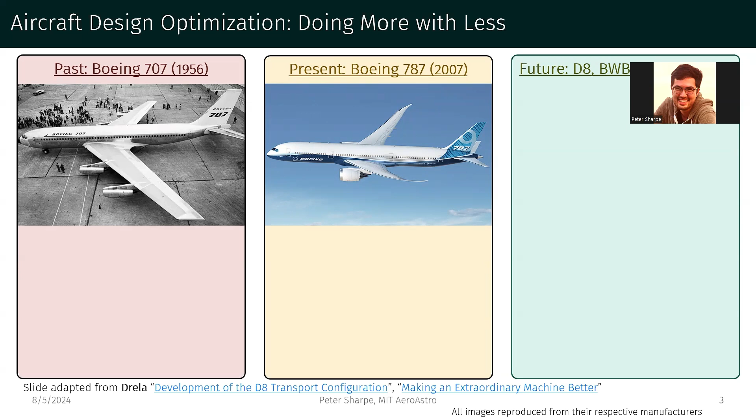So I'd like to start off with some comments adapted from remarks that Mark made. If you look at the history of aircraft design optimization, in about 1956 we got the first jet airliner. Today we've got something that looks pretty similar, but under the hood a lot is actually different.

In terms of fuel economy, we've gone from about 45 passenger miles per gallon up to about 120 or so. If you look into the future, you can target numbers as high as 160 passenger miles per gallon. Now it's kind of instructive to think about what are the technologies that actually got us to each of these levels.

If you look in the past, the mindset was something called satisficing, which is basically a decision-making heuristic that you go through when optimization is intractable. It's kind of the engineering equivalent of good enough.

Today there have been massive advances, especially in propulsion, but also in subsystem level optimization. So taking the problem, splitting it up into different disciplines and optimizing those together.

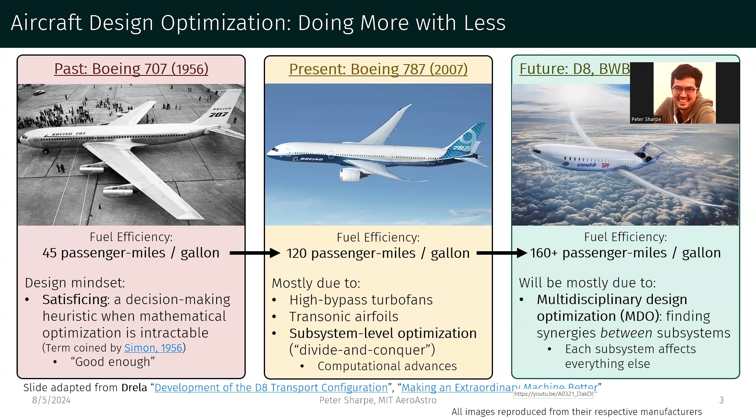Now looking forward, most of the fuel efficiency gains that we expect to see are actually from taking the whole system together. This is called multidisciplinary design optimization, or MDO. It's about finding the synergies between subsystems rather than within them.

And the particular flavor of MDO that we're going to be focusing on today is what's called conceptual MDO. This is kind of the initial study of design trade-offs that you go through, basic feasibility and sizing.

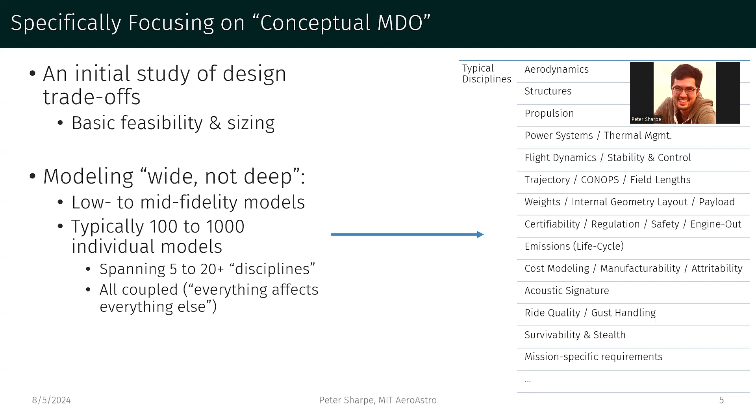And the idea here is that we're modeling wide, not deep. So we're talking low, medium fidelity models, relatively simple, but maybe hundreds or even thousands of them. Typically those are lumped into what we call disciplines, different ways that you can analyze the design - aerodynamics, structures, propulsion - but there are many dozens of others you could consider, and all of these interact with each other.

So why do we care about this particular kind of early stage conceptual optimization? Well, the first reason is that most of the performance of the final design is actually determined by your early stage decisions. A lot of this low-hanging fruit, you can't capture those opportunities later if you miss it in the early stage.

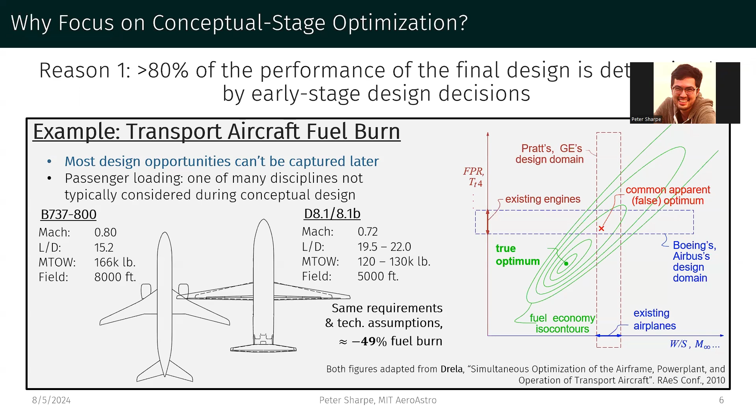Similarly, you can't really fix the problems later if you don't catch it in the early stage. So that's really what we're after.

Secondly, these days there are a lot of new technologies, specifically thinking about electric aviation, drones, UAVs, that are enabling us to go back to the drawing board and look at the early stages of aircraft design again. This is exemplified here by a lot of the electric vertical takeoff and landing aircraft.

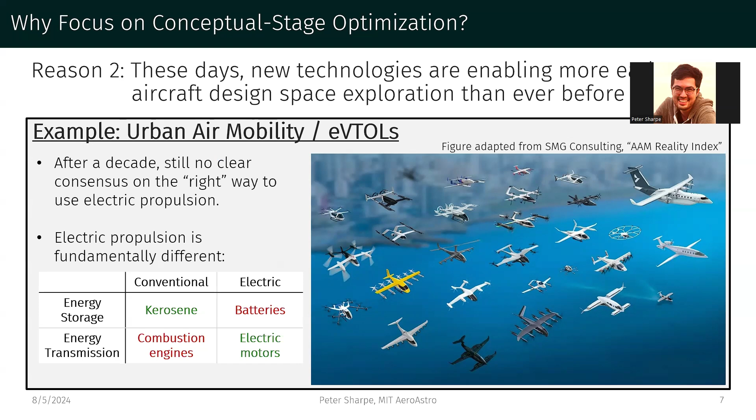And even after 10 years of playing with these technologies, it's still kind of the Wild West. There's not a lot of convergence in terms of what these necessarily look like.

The final reason is that optimization itself - a lot of times we think about getting to the optimum design, whatever that may mean - that's really only about 10% of the value.

A lot of the value of doing this exercise is actually in determining what questions you should be asking. What are the market trade-offs that you might look into? Where should you spend your R&D budget? What kind of model assumptions are you most sensitive to?

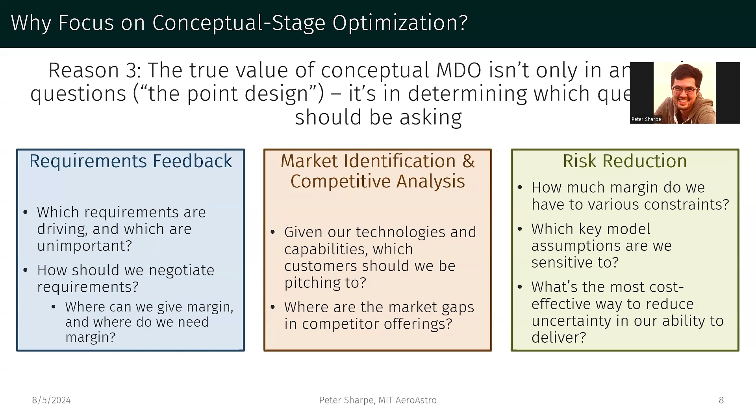So with this in mind, we can kind of look at, okay, we've done all this research in MDO, where do we kind of stand?

This is recognized in a couple places, most notably in an MDO colloquium in 2010. The ultimate benchmark of a field's impact is how much it's actually getting into industry. And going through the literature, we see kind of a mixed bag. On one hand, everyone recognizes the immense power of advanced optimization methods to solve some of these previously intractable problems, and there have been headway made.

At the same time, it's usually this double-edged sword where actually implementing these in an industrial setting has a monumental level of complexity in some cases. So because of this, the same colloquium concluded that the actual use of genuine MDO is somewhat limited.

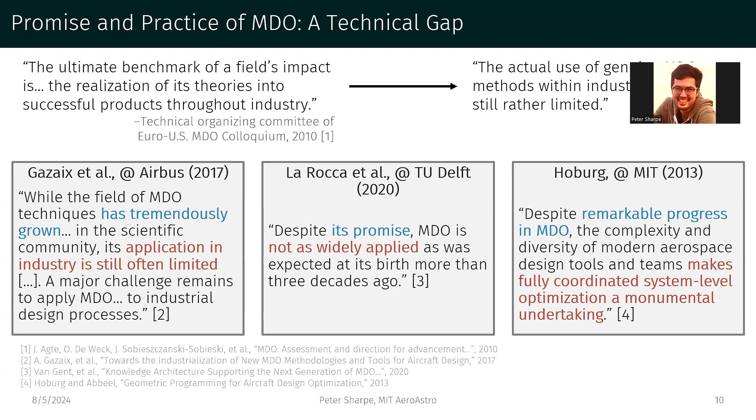So that's kind of the context in which this thesis starts, which is basically how do we actually take some of these big research wins and translate them into more industry impact. And the contention here is that we basically need to do optimization while considering all costs. We use costs here deliberately because that's kind of the language of optimization. Typically, we're minimizing some kind of a cost function.

If we think about our typical mental model of optimization, we've got a problem. It's got an objective function that we minimize. It's got design variables, the things we're changing, and then it's got the constraints. And that result has some cost associated with it. We could also think about the computational cost of getting to that solution. But there's a much broader picture here that we also want to consider.

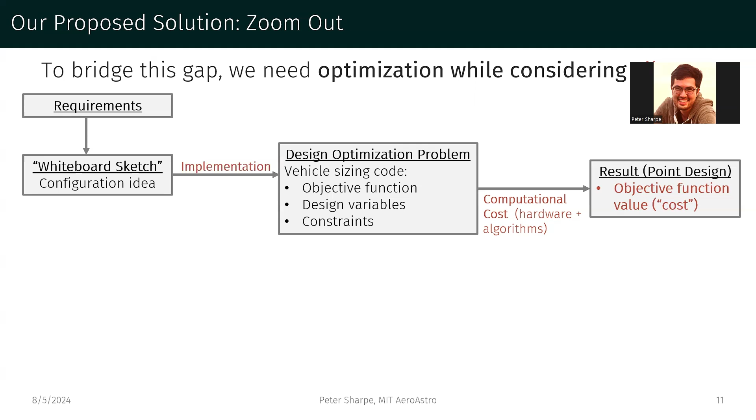First of all, we actually need to go from our problem specification, which is usually in a Word document or some kind of written or verbal form, and translate that into a precise mathematical paradigm. Depending on the framework, that can be very easy or very difficult. Similarly, oftentimes we don't get that right the first time. In fact, we almost never get that perfect on the first time. So there's a cost associated with going back to the drawing board and reformulating that problem.

Maybe we want to freeze something and optimize over other things, or maybe we want to study what happens if we change the sensitivity of certain parameters. Secondly, in addition to the problem-specific stuff, there's also physics modeling we need to incorporate. These aren't specific to the particular airplane you're designing, but basic modeling like aerodynamics, structures, propulsion, different pieces. Getting those into the framework has a modeling cost.

Ideally, the design also doesn't end at the point design phase. Ideally, you can carry this forward. And if you're going to build this, often there's some kind of design review process you go through. There's an interpretability cost of determining: can you actually convince an external audience that this design, and the way you got to it, is trustworthy? How interpretable is this optimization process? Again, that's something we can consider when we sketch out a framework.

Finally, even after the final design is made, after you're building it, you may get halfway through and find that one of the components isn't performing up to spec, and now you need to redesign around that. Or you want to track a digital thread or digital twin as you have some kind of ongoing hardware. Again, a framework can potentially support you through these steps of the design process.

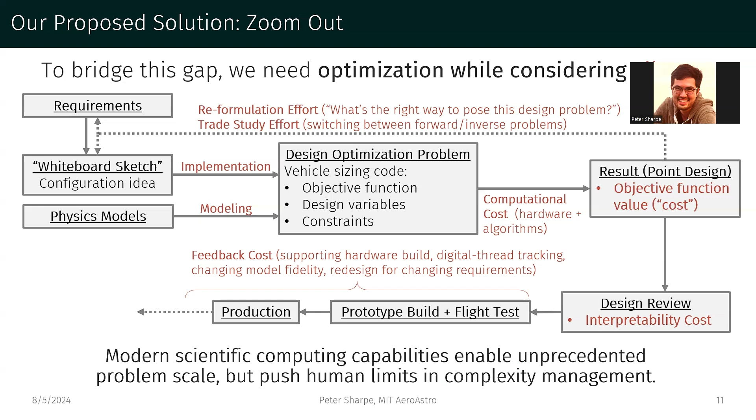So the takeaway here is that modern scientific computing capabilities enable unprecedented problem scale, but they really push the human limits in terms of complexity management. And that's really what the thesis is aiming to tackle here.

Now, if we look at what people do today, because optimization is used in some forms in aircraft design today, there are three main paradigms out there. The first one is called black box optimization. This maps very closely onto our mental model of optimization. You get your analysis tool, you wrap that inside an optimizer, and then you iterate. This encompasses probably 95% of industry codes today, or some flavor of this.

The reason for that is that they're very easy to implement. You can go from your whiteboard drawing to code very quickly, and they let you model more or less anything. The downside is that the runtime is not very scalable. Once you get beyond, say, a dozen design variables, it starts to become exponentially slower to run. Because of that, this has motivated research into other possible paradigms.

The first one that has gained traction is gradient-based methods with analytic gradients. This is similar to black box optimization, but you provide exact derivatives for every component model that you stitch together in order to accelerate the optimization process. That gets arguably the best speed and scalability you can achieve here, but actually implementing those derivatives, especially for custom models, becomes somewhat expensive on the user development side.

The third kind of approach is what's called disciplined optimization. An example for the aircraft design crowd might be GPkit. The idea is that you take the mathematical space the user is allowed to model in and restrict it either to convex functions, geometric programs, or some flavor of that. By doing that, you can make certain assumptions about the user's code, making it easy to model but also fast to run. The downside is that by restricting the user to this mathematical subspace, they may not be able to model all of the physics they wish to model.

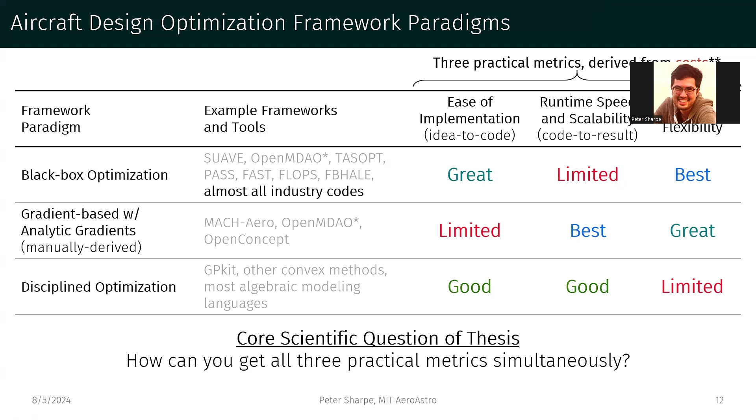So the core scientific question of our thesis is: is there a way you can do okay, at least, in all three practical metrics simultaneously? The contention is that code transformations, which we'll define next, are a path to doing that. That's what this thesis is about.

To overview the specific PhD contributions: the first is this code transformations paradigm—we'll define it and give a proof of concept along with case studies. Second, we'll fill that out with traceable physics models inside that framework. Third and fourth, we'll talk about strategies to incorporate black box code into this framework. Fifth, there's a system identification study, another case study using this framework, but we'll skip it in this talk for time.

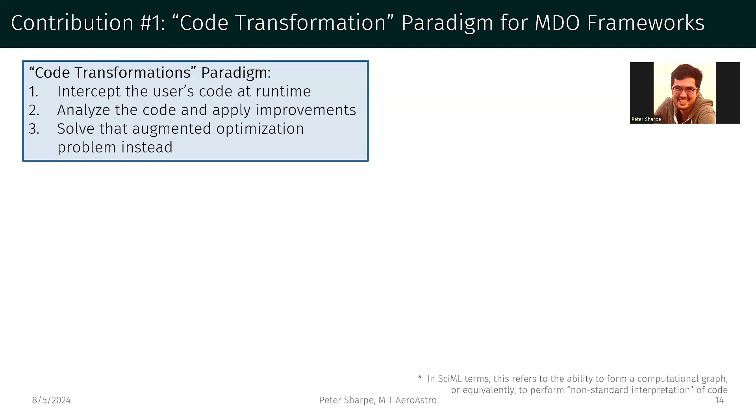So let's start with what is a code transformation. At a high level, code transformations are any kind of transformation you can apply to code that intercepts it, analyzes it, applies some improvement, and solves an augmented optimization problem instead. That's a pretty broad definition, and it actually encompasses a lot of modern techniques in math and computer science—most notably automatic differentiation, but also sparsity detection, automatic scaling of problems, log transformation, eliminating common sub-expressions if you can find redundant computations, computing on different backends, things like that.

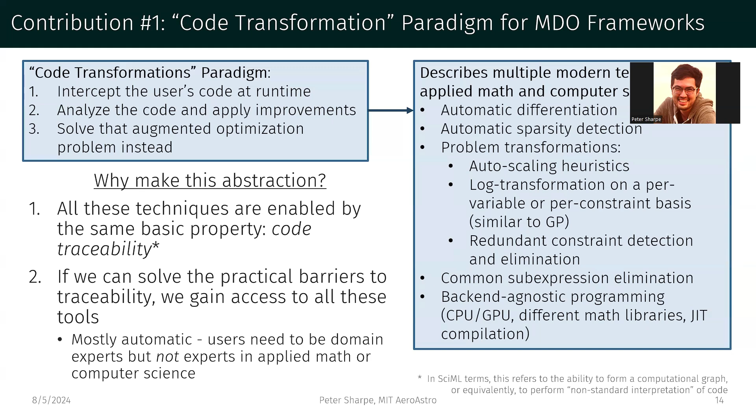These are all fine by themselves, but the reason we pull this out is that it recognizes all of these techniques are enabled by the same underlying requirement of code, which we call code traceability—essentially the ability to form and manipulate a computational graph of your code. We'll show what that means next. The basic reason for this is that if we can solve this traceability problem, if we can make it easy for industry engineers to write traceable code, we kind of get most of these transformations for free. It means the user can get fast code without necessarily implementing all these techniques on their own, without being applied math or computer science experts—only experts in their engineering discipline.

So the first contribution of the thesis includes a proving ground for evaluating what these frameworks look like. That's called AeroSandbox—it's a Python package, open source, available on GitHub. It's a proof of concept of what these code transformations could look like in design practice, both for airplanes and for other engineering systems. We'll start by talking about some of the numerics and optimization happening inside this.

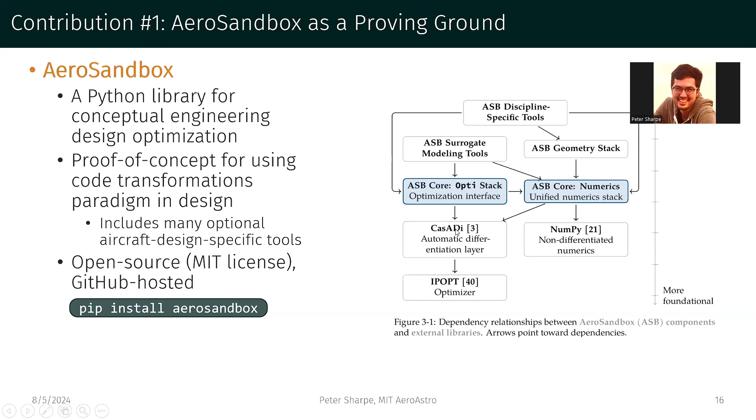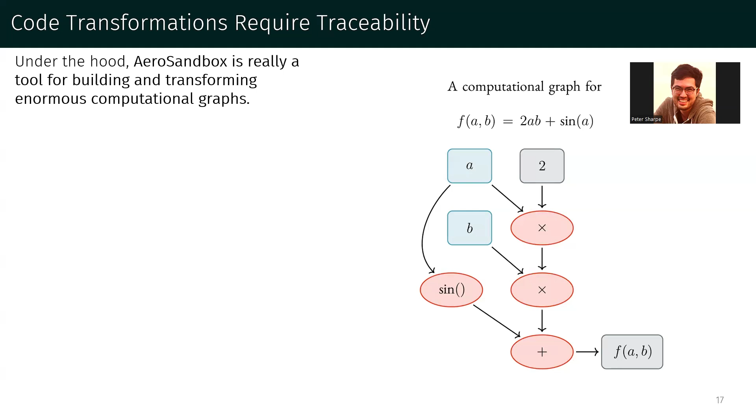So first, we talked about a computational graph earlier as being the key thing for whether code is traceable or not. What do we mean by that? A computational graph is essentially a way to map out the execution tree of a piece of code. Imagine you have some expression—you can map out what sequence of operations you have to perform, step by step, in order to get to the result. This is a directed acyclic graph that you can make for most computer programs, assuming you can see inside the black box of different functions.

So how does this actually work out in practice? Again, our three metrics: we want to go from an idea to code fast, we want to have speed and scalability, and we want mathematical flexibility.

If we compare to black box optimization methods, we can test on something like the Rosenbrock optimization problem. This is kind of a standard test case in optimization, and here we work with an n-dimensional variant that gives us a knob to change the difficulty of the problem. Now, as we change the number of design variables, how does the computational cost scale? We can evaluate for a bunch of different methods.

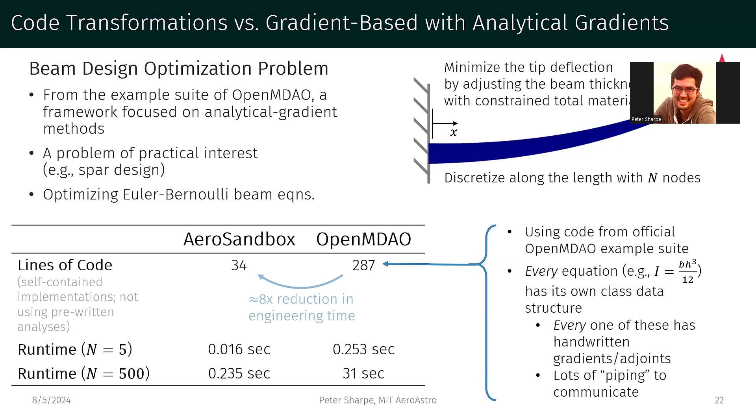And because of that—again, that's an imperfect metric—but it corresponds to a decrease in the amount of engineering time. Often that means you may be willing to pose questions you might have otherwise deemed too complex before. In fact, this code is short enough that we can show it here on one slide for this beam design problem.

So what's actually happening here? Well, we're defining constants here, initializing an optimization environment.

And then we get this very modeling-language-like syntax where really we're just implementing the actual governing equations themselves, boundary conditions, and then the actual solve is just a single line here. So it's pretty abstracted in the sense that the user doesn't have to tweak anything if they don't want to.

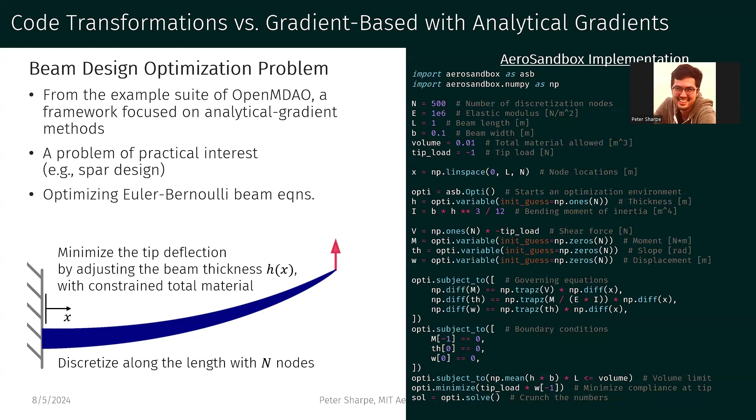There are sensible heuristics applied throughout to get good enough results. Under the hood, they can expose as much of this as they wish, but at least the learning curve is made more shallow by having a simple default API here.

So what are the pros and cons of this code transformations framework? Well, the benefit is that you can get the performance of efficient code without having to write efficient code. So you get comparable speed with not as much effort as it ordinarily might take. It also abstracts away the optimization-specific details, meaning you can focus on asking the right engineering question rather than getting the numerics perfect.

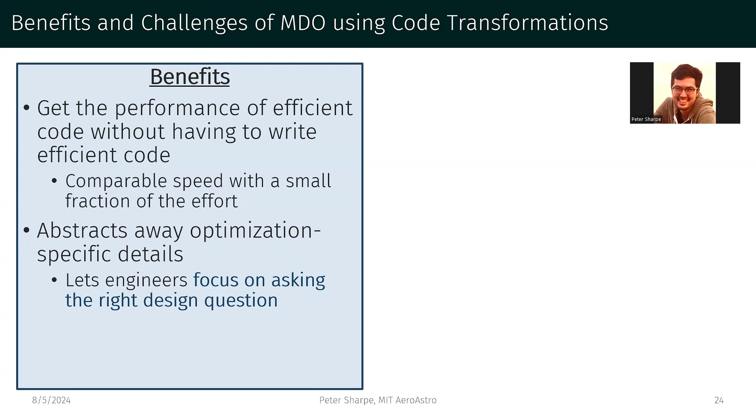The downside of this is twofold. First, we need to actually intercept the user's code in order to make that computational graph representation. So we have to make assumptions about what that user's code does; in particular, it has to use our numerics library to achieve that. Framework syntax becomes critical, because as soon as you ask the user to deviate from the workflow, you're potentially completely negating that ease-of-use benefit. So you really have to think carefully about what the user experience is going to look like.

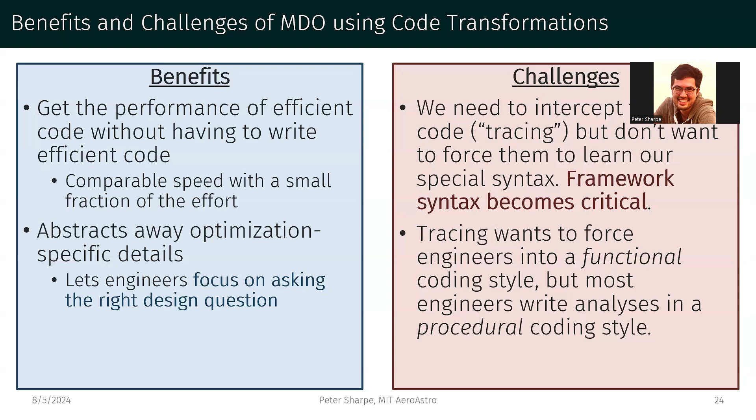Secondly, the user's code style also has to be considered. Engineers like to write a type of code often called procedural code, that looks like a script or a spreadsheet - that's how they build up analyses and then flip it into an optimization framework. A lot of automatic differentiation frameworks, other code transformation frameworks, expect what's called functional code, or pure functions. That's not necessarily the best map onto how engineers naturally write code. We can talk more about that if people are curious.

So how are we actually making these computational graphs? Like I said, we basically have to intercept the user's code. But the trick is we want to be a little tricky about how we do that - we want to basically silently swap their math library in a way that they don't really notice.

So what do we do? We basically take the standard Python math import that a user might write code in, and we swap it out with our own version, which duplicates the API one for one, parameter for parameter. So we can intercept their calls, meaning that if they pass in a type, or a type of array, that needs derivatives or needs sparsity, we can apply the appropriate framework to that.

But if they don't do that, it's essentially a pass-through into the basic NumPy framework they were expecting to use anyway. The nice thing is that existing code that's out there, provided it's written in Python and with common packages like NumPy, SciPy, and so on, can basically be ported over one-for-one, with a couple of caveats.

And the goal here, again, is all about the learning curve. If an engineer knows Python, we want them to be able to more or less jump into this with minimal additional learning. So that's the first contribution of the thesis here.

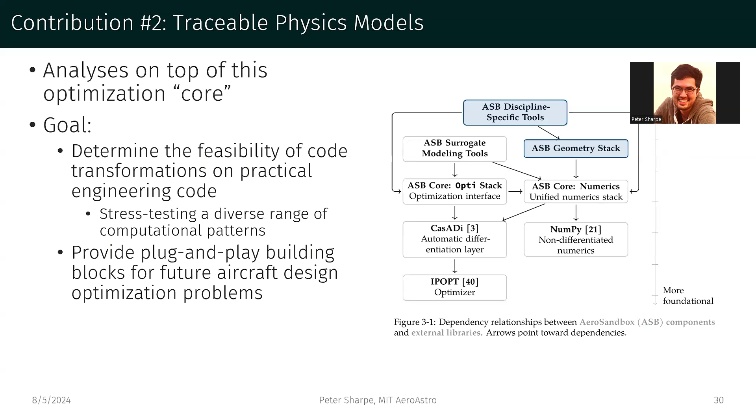The second one is, okay, we built this framework, but now we want to test out whether this is actually practical for engineers. The second thing we can do is build analyses on top of this optimization core to figure out, if we stress test a diverse range of computational patterns, does it actually work in practice? And then, if we want to pose aircraft design problems, does that work?

So underneath the hood, there are a lot of models that have been implemented on top of this, all your bread and butter aircraft design models. Here, we're going to talk about just a couple of them, specifically the aerodynamics and the flight dynamics ones, mostly because they have the most interesting visuals, I think.

Happy to talk more about the areas that people have interest in.

If you're going to do engineering analysis, a lot of it requires discretization of some sort, otherwise known as meshing, and there are different ways you can do this. So the first thing we do is build a differentiable geometry stack, a differentiable meshing stack, which can take abstract geometry representations, kind of your AVL style aircraft model, and form a 3D mesh out of that.

It can form a 3D mesh at different levels of what are known as degenerate geometry. This is taken from a strategy used a lot by OpenVSP. So you can have meshes of individual spars, of thin surfaces, of full outer surfaces, different parts of the aircraft, depending on what analysis you're doing.

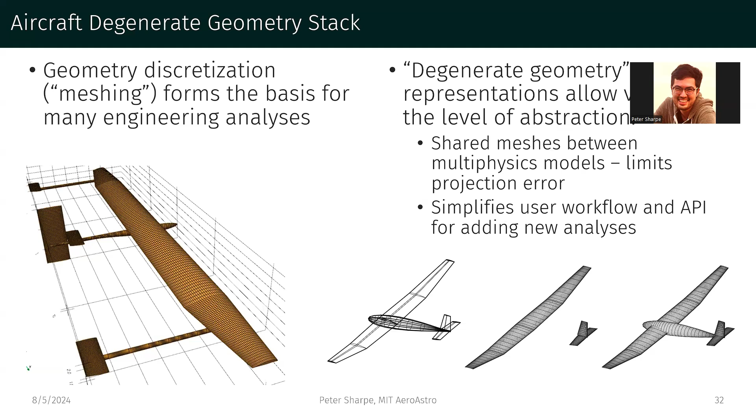The benefit is that if a user wants to add an analysis, the learning curve is a lot shallower—they don't have to do their own meshing. Secondly, if you have a multi-physics problem, like an aerostructural analysis problem, you don't have any interpolation or projection error between different meshes. You can use the same meshes for different problems and solve it exactly that way. That's the benefit of making this abstraction.

So what are some of the models implemented here? The first one, bread and butter, is a vortex lattice method. This is used every day for rapid stability and control analyses of different aircraft, initial configuration aerodynamics. It stress tests the robustness of the geometry stack, as well as basic linear algebra kernel operations.

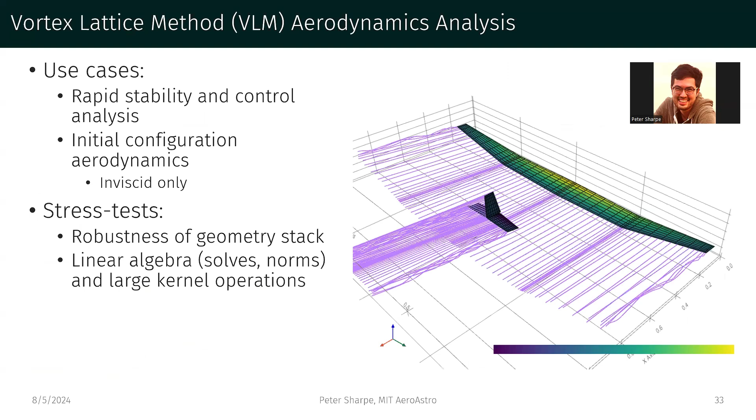The second thing we can do is a lifting line-based aerodynamics analysis. That's similar to the vortex lattice method, but compared to it, it has profile drag, faster runtimes, and better optimization stability.

There are a couple different lifting line models implemented. The first one is traditional—basically a linear lifting line model. Here the CL alpha, the lift curve slope, is assumed to be linear, and you can do some simplifications based on that.

There are also quasi-linear and fully nonlinear models. Those give you increasing fidelity in certain interesting aerodynamic cases. These stress test nonlinear systems of equations, as well as making a computational graph through value-dependent code execution.

What I mean by that is if you have a nonlinear solver, you don't know a priori how many iterations it's going to take to converge. So the computational graph isn't fixed as soon as you run it. In some sense, you have to embed a variable computation step in there, which can dynamically adjust depending on how many iterations it may take to converge. That's an interesting stress test case.

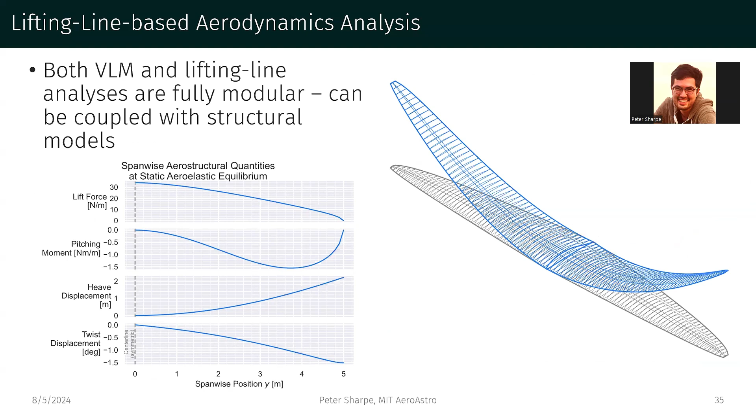Just as an example, by having the uniform geometry stack, we can do interesting problems like an aerostructural analysis problem very quickly just by stacking these different analyses on top of the same meshes.

The final aerodynamic model included here is what's called aero buildup. This is the one we probably use most often and is one of the more interesting ones in my opinion. This is basically a fully differentiable DATCOM-like method, or semi-empirical aerodynamic buildup.

In regions where flow is well behaved, it uses theory-based models. In regions where it's not, it uses extrapolations to wind tunnel data. It's essentially C1 continuous, so a smooth model across all ranges of Reynolds numbers, Mach numbers.

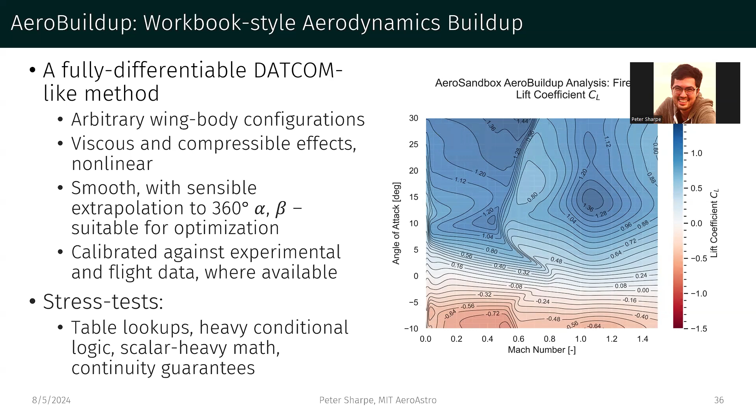This is stress testing table lookups, heavy conditional logic based on all the different orientations—can you actually guarantee continuity when you're stitching across anything from very low Reynolds flight all the way to transonic, high alpha flight, continuously?

It's kind of interesting to see what that graph looks like when you expand it out. This is for the Firefly aircraft, which we'll show in a little bit. You can see you get modeling here in the linear regime, and as you go through stall and then into deep stall, you get more and more interesting effects, but it's all C1 continuous through it.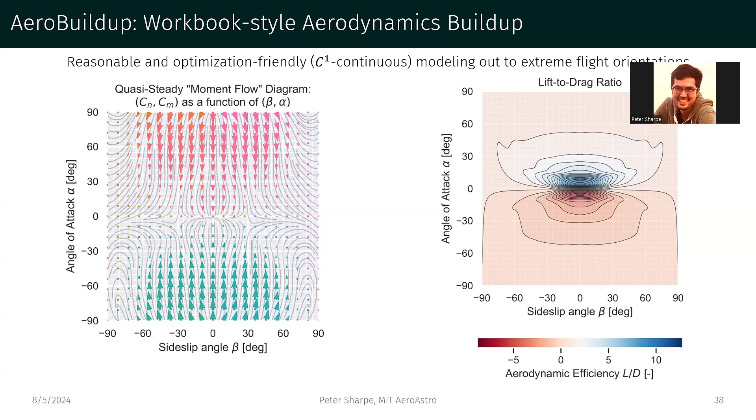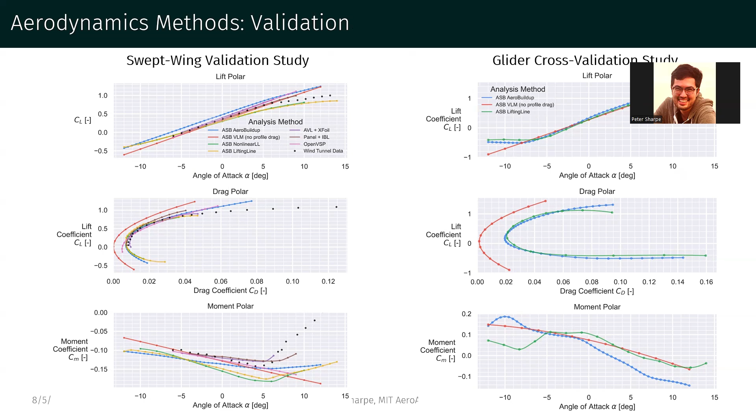In the thesis, the written document, there are a couple of validation studies for these various aerodynamic analysis methods. We won't go too much in depth here, but in short, the vortex lattice method is the most accurate one for stability and control for moment prediction, whereas the lifting line and aero buildup methods are more accurate for performance prediction—CL, CD, and things like that.

One of the other models we built on top of this framework is rigid body equations of motion. This is useful both if you want to do pure trajectory optimization problems, but also if you want to do combined vehicle and mission design problems together. It's variable fidelity, so at the simplest level it's essentially just energy accounting of an airplane, and at the fastest level it's integrating moments and forces to actually time-domain integrate through some kind of trajectory. You can switch off which modes you care about.

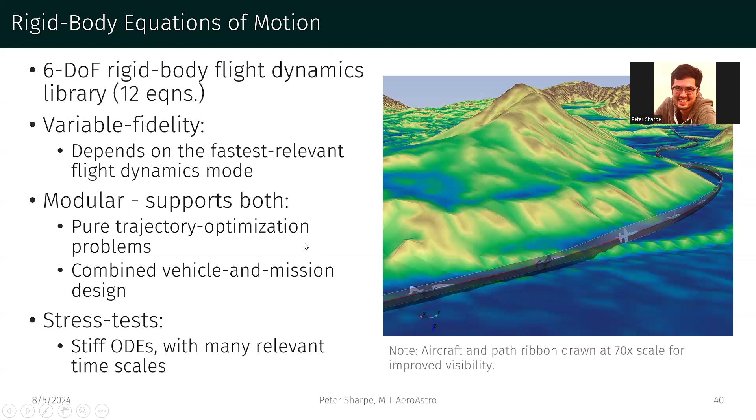This, of course, is testing stiff ODEs with many relevant timescales together. You may have a control surface that actuates at 5 Hertz, but have a phugoid mode that's 1 per 100 seconds or something like that. So you can think about those together, and there are some interesting optimization challenges with that.

A cool case study here is an air racing trajectory optimization case study, which we demonstrate in the thesis. This video isn't going to play, bummer. Basically, we optimize the trajectory of a fighter jet through a low altitude canyon, flying as fast and as low as we can.

We actually discover some interesting real maneuvers here, such as an inverted roll when you go over the top of a mountain, a ridge crossing maneuver here. This is kind of interesting.

This problem is essentially a model predictive control problem over about a 5-minute decision horizon with sub-second decision resolution. That goes back to the idea of multiple different scales interacting here. And it's highly non-convex—do you go to the left of the mountain or do you go to the right of the mountain? There are some interesting heuristics and challenges you can use to make that a little better behaved.

The final contribution, or final analysis we contribute, is a linearized aircraft stability analysis. An example of this would be if you're designing an airplane: you have your short period mode, your Dutch roll mode, and you want to place certain constraints on that—the damping ratio, the frequency associated with it. Can you actually do pole placement of those at the same time you're designing the rest of the airplane?

Now, with a differentiable map through this eigenvalue decomposition, you can actually do that. That means you can consider stability and control from the earliest stages of design. Especially when you get into weird designs, stability and control is often the thing that kills a lot of otherwise promising designs, so it's useful to bring that in early.

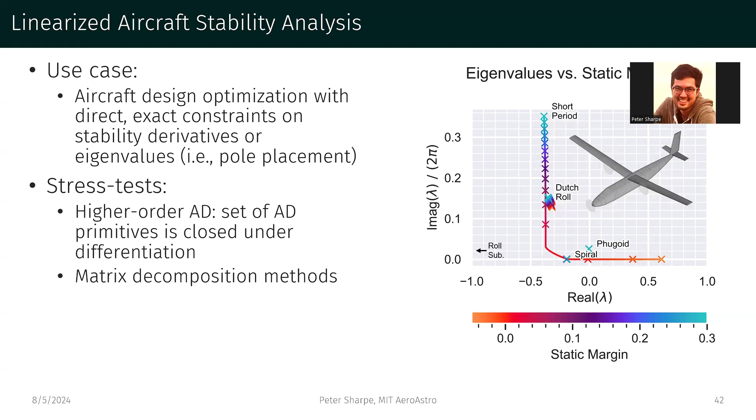When developing this framework, we went through what we call a spiral development process. What we mean by that is that, about every 3 to 6 months, we iterate through this cycle of: using this framework, let's actually design, build, and hopefully fly an airplane, and see how we can improve that aircraft design.

And then we flip it around and do a retrospective, which is, based on that airplane case study, what were the things that were easy, what was hard, what was easy to pick up for new users, and how can we modify the framework itself to make that better. We've gone through this loop maybe 3 or 4 times with different aircraft, and here we'll talk about some of those aircraft, what they look like, and some of the things we learned or capabilities we added as a result of that process.

So the first aircraft that we'll talk about is slides are so finicky. Okay.

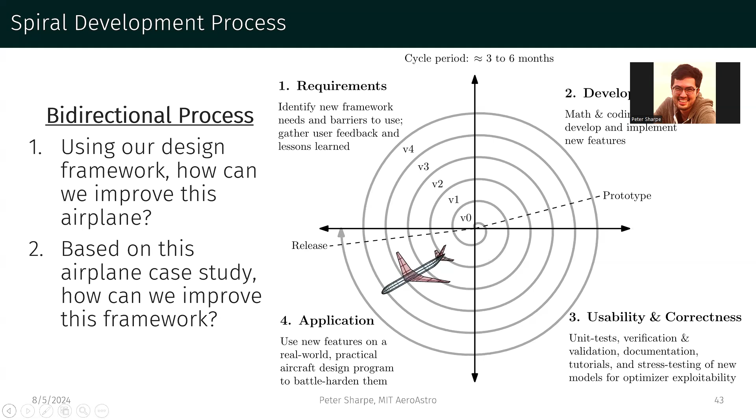The first aircraft we'll talk about is MIT Firefly, which some of the people in the room worked on, especially Julia here, who did some of our hardware construction.

Firefly is basically a tube-launched micro UAV that launches out of an F/A-18 at 90 degrees angle of attack. It's air deployed at Mach 0.8 at 30,000 feet. We want to maintain Mach 0.8 flight for 60 seconds, and the objective here is to maximize the total range.

So this airplane, the tricky part is how small it is. It's about the size of a Pringles can, so we're really very volume constrained, and everything is fighting everything for volume requirements it wants to use.

So we set this up as a design optimization problem with 6 coupled disciplines: aerodynamics, structures, stability and control, propulsion, optimizing the trajectory, and the big thing here was the volume, just making everything fit. In total, that optimization problem is about 4,000 variables, about 8,000 constraints, a lot of which come from that trajectory formulation, and it's nonlinear and non-convex.

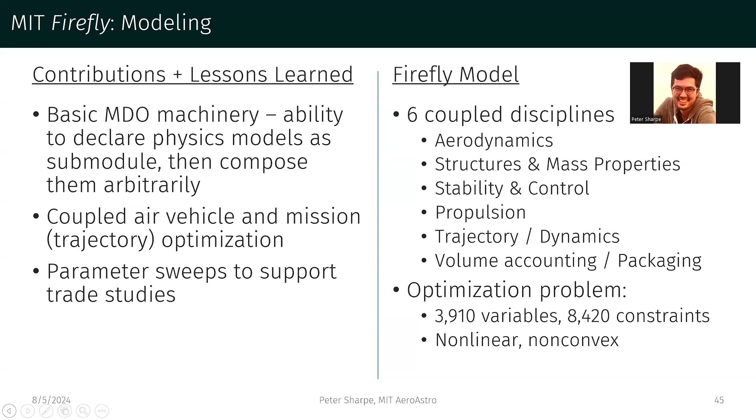The cool thing here is that, with code transformations, we can solve this pretty quickly in only a couple seconds, which means it's fast enough that we can do interactive design. The other part that's equally interesting is that we can solve it with relatively few lines of problem-specific code. We can use a lot of those off-the-shelf models as plug-and-play pieces, so we don't need that much engineering effort to go from a whiteboard sketch to an initial feasibility study of whether this concept is going to work.

As a result of this, we increased the flight range from what we had projected on paper, from about 82 kilometers up to about 250 kilometers, with this resulting design, which has the CAD model here, prepared by Julia.

How do we get such a large range increase out of this vehicle? Well, a lot of it comes down to coupled vehicle and trajectory optimization, which we hadn't considered. We had just initially assumed we launch at 30,000 feet, we stay at 30,000 feet, and then once we run out of rocket engine propulsion, we glide to the ground.

It turns out that what you can actually do is fly on this boost glide trajectory. Initially, right after launch, you fly very, very high. Then you basically act as a high altitude glider and fly down the rest of the way. That means you're less optimized for that dash condition at Mach 0.8, but more optimized for extending the range of this glide. That's a synergy we didn't consider before we had actually coded this and run it in an optimization framework.

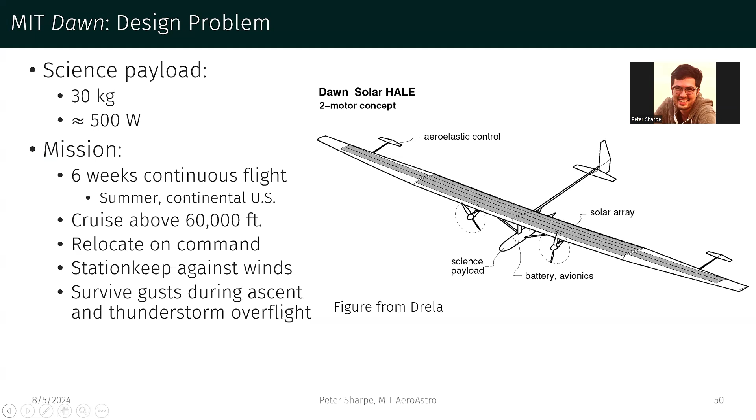And there are some challenges with that. You need to station keep against winds, you need to survive the gusts on ascent, and making sure that you can close the energy margin for overnight flight with batteries is also a pretty big limit. So one of our key early questions was: where in the world could we actually fly this?

If we change the season that we fly in, so which month we fly in, and the latitude that we fly at, how does the required size of the airplane change? A smaller airplane means less aerostructural risk, less cost, and easier prototyping. We wanted to figure out what's the easiest place in the world to fly this and what's the easiest month to fly it in.

Intuitively, you'd think sunny conditions make it easier to fly a solar-powered airplane, so you fly near the equator in the summertime. What we actually see is that the thing that matters most is the length of the night, because that determines the battery sizing. So where you actually get the smallest airplanes is in the Arctic in the summertime, because of the midnight sun effect, and similarly in the Antarctic in the wintertime, or in December I should say.

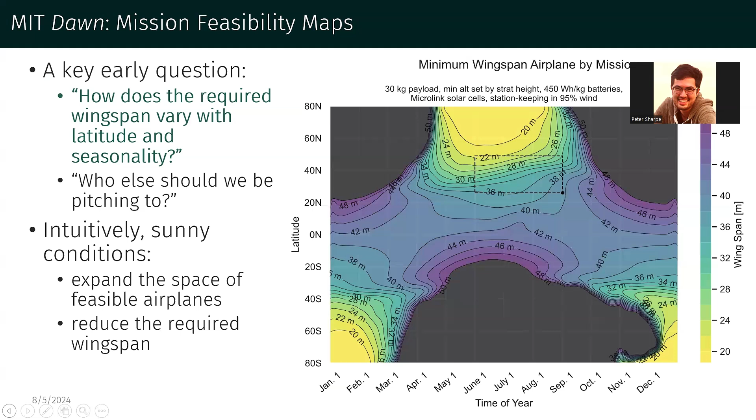So how did we do an analysis like this? We formulated an optimization problem for that airplane, assuming some seasonality and latitude. Then we designed 2,400 unique aircraft for each point in a 60 by 40 grid in seasonality-latitude space, to figure out what's the minimum wingspan airplane you need to fly here if you have a rubber airplane.

And the cool thing here is that because of the speed, you can actually do this interactively. In total, if you massively parallelize this run on a high-performance computing cluster, it executes in only a couple minutes. So you can do studies like this in real time while thinking about it with other engineers in front of a whiteboard.

Based on this, we identified some early missions of interest. You can see our initial science mission here in the rectangle. We gained a lot of intuition about the design space that we otherwise probably wouldn't have gotten until later in the process.

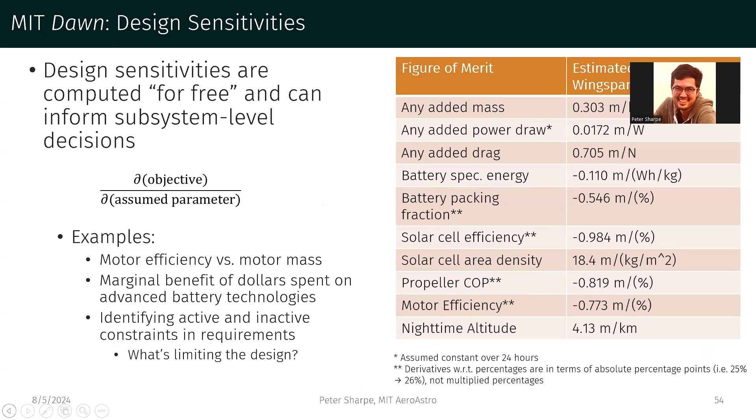The other thing is that due to some of the methods about how the optimization solve happens, you get the design sensitivities for free—how things change as you change some of your assumptions. That's very useful information to have early on, especially as you're thinking about how to spend the R&D budget in different areas. Is it worth taking a motor weight hit if you get better efficiency? Questions like that.

And then finally, this model, with a lot of excellent engineering work from Harvard, Electra.aero, and other people, was actually carried forward into a first flight in September 2022, which was a very rewarding thing—to see this model kind of take on a life of its own eventually.

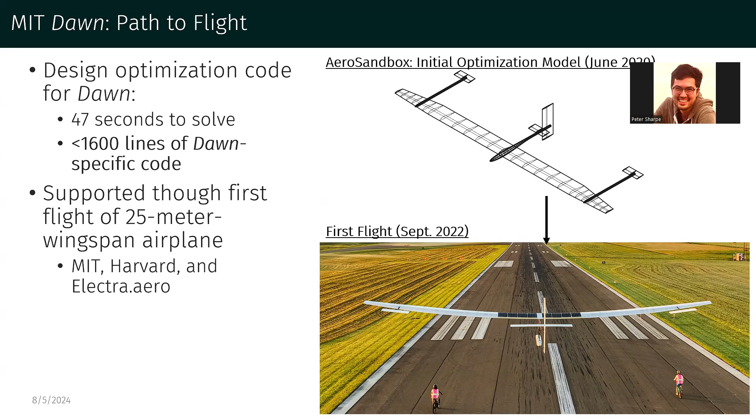Let's see, we're going to skip through some of these for time here.

I'd like to go into contributions 3 and 4 of the thesis, which is basically: this is great if you can make a computational graph of the user's code, but what if the user has what's called black box code, meaning legacy code written in a different programming language, or in some other way where you can't directly access the internals of the code to make that graph? Well, there are a couple strategies here.

In short, if the model's smooth and you can provide gradient, adjoint, and sparsity info, you can define it as a new primitive, its own operator, and throw it right into the framework, and you're done. However, if you don't have that information, you may be stuck running it as a true black box, just finite differencing through it, assuming fully dense Jacobians. Or you have the option of making a surrogate model.

So some kind of faster standalone model coded within a differentiable framework that you can swap in there. Here we're going to talk about some interesting developments around these options. The first thing we'll talk about is a strategy called NaN propagation. To motivate this, we're going to take an example model actually taken from some of Prashanth's work through TASOPT.jl. This is a wing weight model.

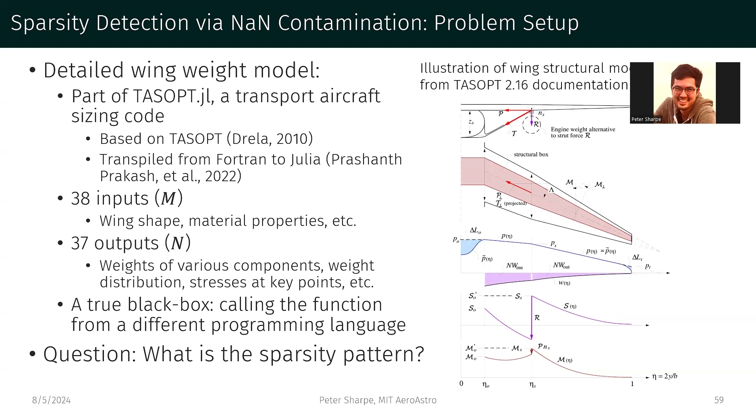Our question is, okay, what is the sparsity pattern? Which inputs affect which outputs? The reason we want that is that if we have that information, we can still make finding gradients of this black box a lot faster.

So how might we figure out which inputs are linked to which outputs? Here in our strategy, we take a representative input, which might be, say, the initial guess for an optimization problem. We basically make different inputs, which we individually seed with NaN value contaminants. NaN is basically a special floating point value which stands for not a number, and these contaminate calculations as they fall through. You can exploit that handling to figure out which inputs are related to which outputs. You get an output, and depending on which ones are NaN values, you can figure out which ones are linked internally.

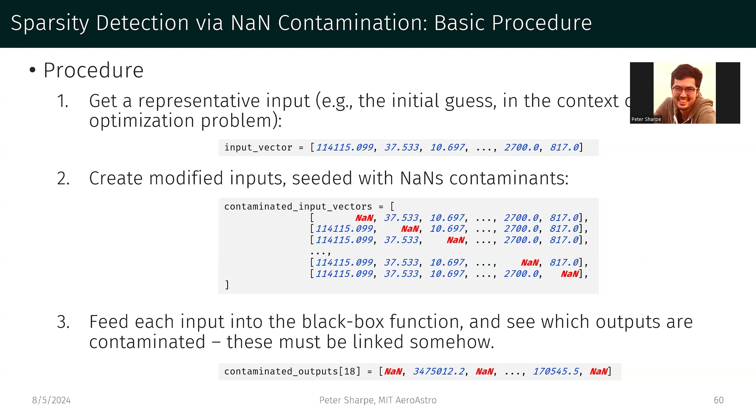The real reason we're interested in this is that it works in basically any programming language. There's an IEEE standard, IEEE 754, which governs how NaN values are propagated through math, and pretty much all programming languages respect this handling. So we can do this in a way that's language agnostic.

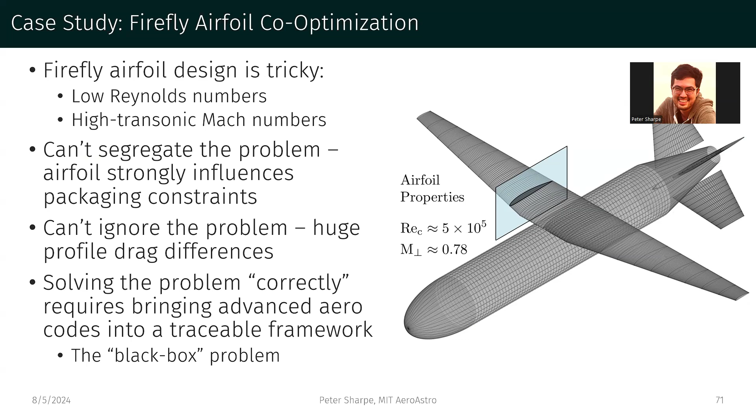If you have to operate at both of these conditions, it's not necessarily obvious how you want to design the airfoil. The problem is that the performance of Firefly is exceptionally sensitive to how you do this, and the trajectory is coupled with it, so you can't separate this out as its own problem that you pre-solve.

So that motivates bringing in an advanced tool to look at some of the finer details of airfoil optimization, like XFoil. Although in this case, we can't do that because it's a black box function. So how do we get around this?

Well, here we trained a model that we call NeuralFoil, which is basically a hybrid of a neural network on the inside and then a bunch of physics priors embedded into that, as well as extrapolation to limit cases. This is trained on about 12 million XFoil runs, which in total is about 2 or 3 days of computation on a high performance computing cluster, although this only happens once.

This model basically takes in all the things that you'd expect: the airfoil shape, angle of attack, Reynolds number, Mach number, turbulence parameters, control surface deflections, and outputs both bulk outputs - lift, drag, moment, things like that - but also enough information to reconstruct the whole flow field, including the boundary layer behavior.

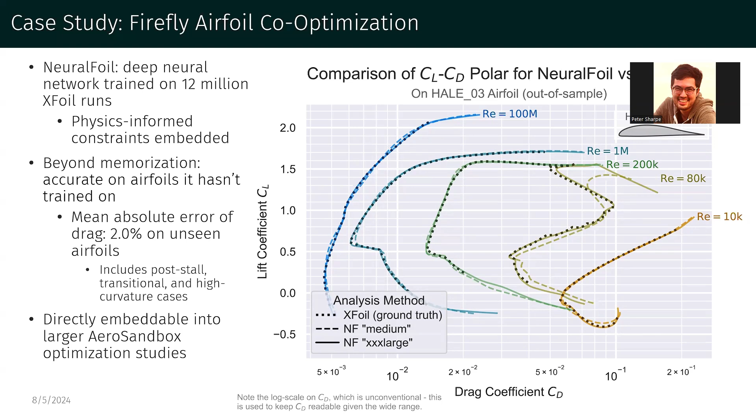The mean absolute error of drag on airfoils you haven't seen is about 2%. That's actually including post-stall, transitional, high curvature cases, all the way out to, I think the max is about 28 degrees angle of attack. So most of this error is actually dominated by some pretty out-there edge cases.

Another way to show generalizability is that none of the training airfoils actually had any control surface deflection whatsoever. So we can test: okay, if we give it control surface deflections, which it's never seen, how does it do? Is it actually learning the physics, or is it just memorizing the input data space? The cool thing is that even out to 40, 50 degrees deflection, you actually get pretty close agreement with newly run XFoil solves here.

Again, there are certain model assumptions that you start violating at this point, but it's a good indicator that you're actually learning underlying physics as opposed to just the training data here.

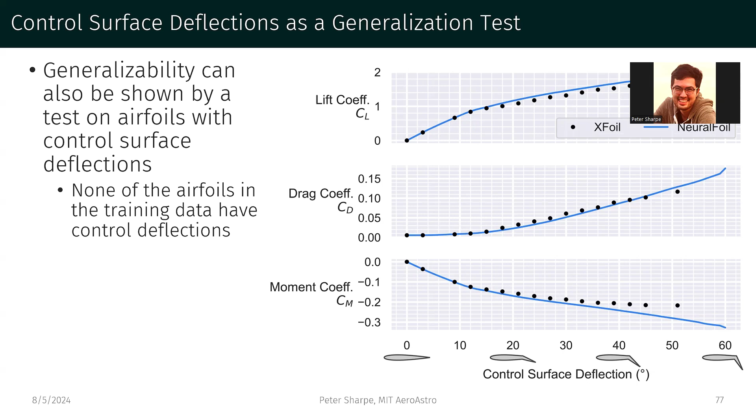One thing - and this is my chance to get on the soapbox - is that a lot of times in these machine learning surrogate modeling studies, you see these really good speedups, but not without controlling for accuracy. The reason that's a problem is that oftentimes if you have a conventional solver, a traditional solver, you can also get speedups just by dropping the discretization resolution, which will drop the accuracy, right? So you really have to do an apples to apples comparison of: is this actually faster at the same level of accuracy or not?

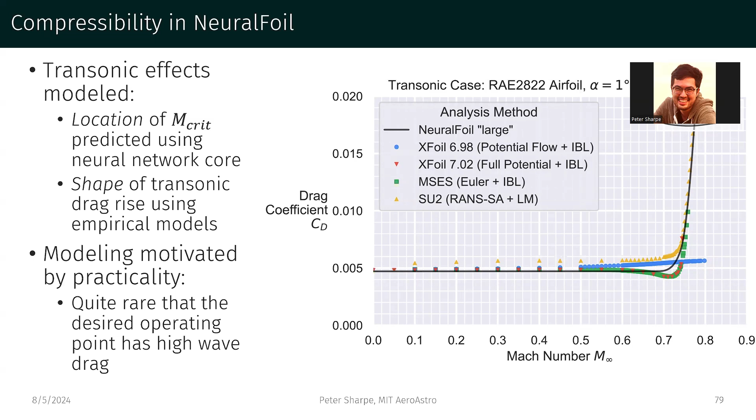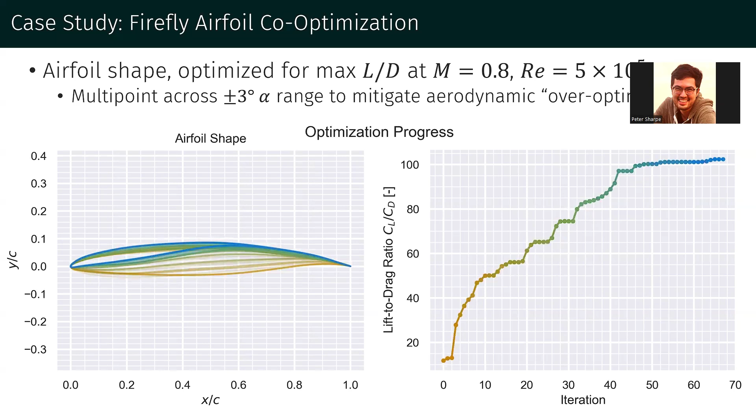So to bring it out and talk about what you can do with this: if we go back to our Firefly airfoil case study, based on this analysis speed and continuity, we can start to do airfoil and airplane co-design optimization. So for the Firefly airplane, a simple study we can run is: if we have our airfoil shape, what if we just maximize it for max L over D at 0.8 and 500,000 Reynolds number? We do a multi-point optimization across roughly a 6-degree angle of attack range, an arbitrarily selected range, in order to mitigate some of that over-optimization. You can see that this can actually be used to drive an airfoil design optimization study.

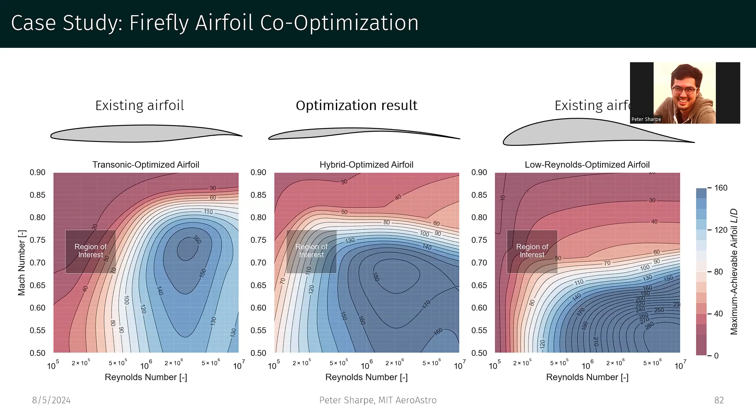So what does this get us in practice? If we've got our Reynolds number on the x-axis and our Mach number on the y-axis, remember we said that there are some airfoils that do well at high Mach but not at low Reynolds, and others that do well at low Reynolds but not at high Mach. We want to do both. This shows that we optimize to push up into this space here. Now, in this particular case, we probably want to add some thickness constraints on this. This is actually, you could maybe make this out of like a single layer carbon or something like that. But there are other constraints you'd want to bring in there, but it's a demonstration that you can start to achieve some of your aerodynamic objectives by optimizing these together.

One final case study with this NeuralFoil tool: if you're optimizing through a physics model, you need to be careful about adversarial optimization. Basically, any model errors are going to be exploited by your optimizer. So you want to know, if you get an optimum result, is it actually real, or are you preferentially going to regimes where the model is invalid? Because that's where it can eke out more performance. Now, there aren't that many airfoil design optimization cases in the literature that have well-documented formulations.

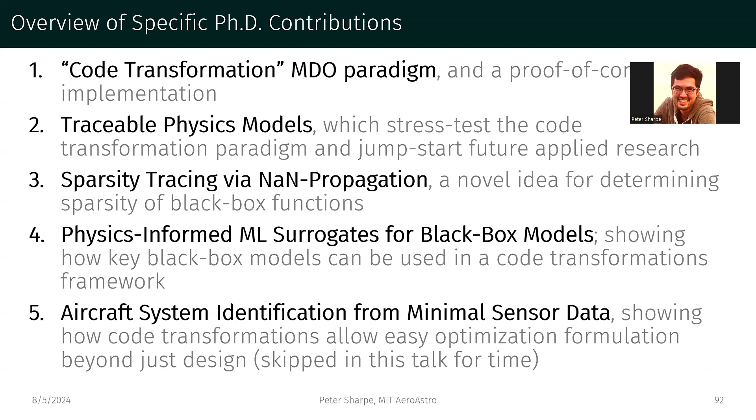Third, it presents a new method for sparsity tracing through black box functions with asymptotically better performance than existing methods. Fourth, it presents a strategy, a demonstration of how you can use physics-informed machine learning surrogates for black box modeling, and achieve essentially minimal loss of fidelity while still being able to run online with the rest of the optimization study.

So the key takeaways here: first, code transformations can make advanced optimization methods more accessible and practical. But if we're going to do that, we really need a dedicated focus on ease of use if we actually want industry to use these tools. And secondly, AeroSandbox is a proof of concept design optimization example, or a framework example, of how you could use this.

And despite being a proof of concept framework, in the five years it's been public, it's seen a lot of industry interest in terms of use cases. We're approaching one million downloads here. And interestingly, maybe a third of the users are not in aerospace. The traceable physics models we've talked about are aerospace specific, but the underlying optimization methodology is broadly applicable to engineering design optimization, whether it's boats, bridges, cars, things like that.

Many thanks to a couple of people. First, the people who gave me money: NDSEG, BAE Systems, MIT Portugal, and the Supercomputing Center here at MIT. Secondly, I'd like to thank a lot of open source contributors, both directly to AeroSandbox, but also to the underlying key software stacks. It really is just this perpetual building on top of buildings. None of this would be possible without many, many people who came before, millions of code hours that people put in.

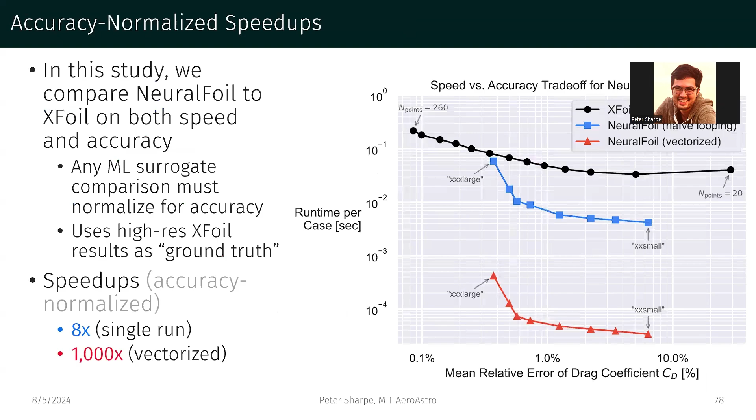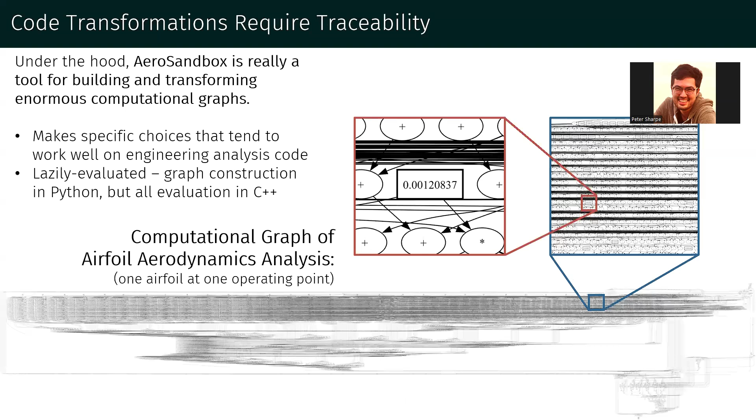Really great work, Peter. And I think the C1 continuity embedded in all of the models, that's awesome, and more people should be doing that. So IPOpt is a local solver, and that depends either on having good initial guesses or a lack of multimodality in your underlying models. So how do you get around that? Or do you have some intuition? Is there multimodality in the problem, and did you start near a good initial guess? Or is there a lack of multimodality in your problem, and you're just going to find it?

That's a great question, a two-part question. So for the first part, let's talk about initial guesses. One of the nice things is that you can do automatic problem scaling, which really diminishes the impact of a bad initial guess. For example, in this comparison here, doing the n-dimensional Rosenbrock problem, the initial guesses actually started from a really awful distribution, about uniform from -10 to 10.

Looking at this chart here, you're way off the optimum. The condition number of the Hessian at the optimum is about 2,500 in 2 dimensions, and it gets worse in higher dimensions. So that's an example of what happens if you have a bad initial guess.

It turns out that if you do a lot of auto-scaling heuristics, you can mitigate that to some extent. Even on applied problems, we find that usually if you're within about 2 orders of magnitude plus or minus on a value, you're pretty likely to converge.

The second part of the question is about multimodality. Unfortunately, I'm not sure we need to find that. So, you're doing optimization, which at a high level means trying to find the minimum of a function, right? You're kind of rolling a ball downhill. That works great if there's only one bottom of that hill. But if you have multiple valleys, which one are you going to go to? You may go to a valley which is low, but not quite as low as the true bottom. Unfortunately, there's no good answer there, because any strategy which tries to explore multiple minima is inherently going to be slower — just the no free lunch theorem.

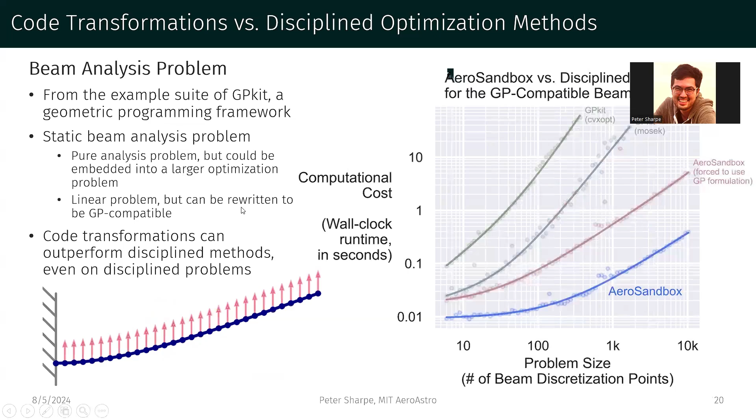So you can solve for one point, you can use both the primals and the duals as the initial guess to the next one, and sweep through some assumption about what your weighting might be. And that parameter you're sweeping over could be some weight that controls the linear combination of objective 1 versus objective 2. So that's a way you could pose it.

There are other things you could do, like a box constraint, or basically move a constraint boundary through this space to sweep through what's the minimum total range you're willing to accept, and build up your Pareto frontier that way. And because you can reuse your previous solutions, it's faster than doing just a blank solve because of that. However, that's more on the problem-specific formulation side, so that's left up to the user in terms of exactly how they want to implement a multi-objective problem like that.

Johannes, if I may, another question.

Yeah. So how well does the user need to understand the design space? And what I mean by that is, to what extent do they need to understand the lower and upper bounds for the design variables and give those explicitly? And how does that impact how well AeroSandbox performs?

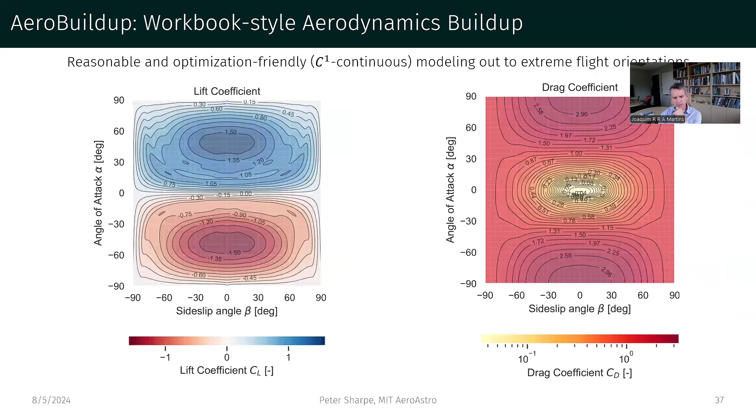So anyway, good. So on slide 19, I agree with Marshall. I think the comparison - when you write BFGS, yes, a lot of people do use finite differences, but a lot of people use analytic derivatives. So I think that's confusing. You need to qualify that a bit better.

All right, so you mentioned, of course - first of all, let me start, you did an amazing job, a lot of work in quantity and quality. I'm really impressed. So congrats.

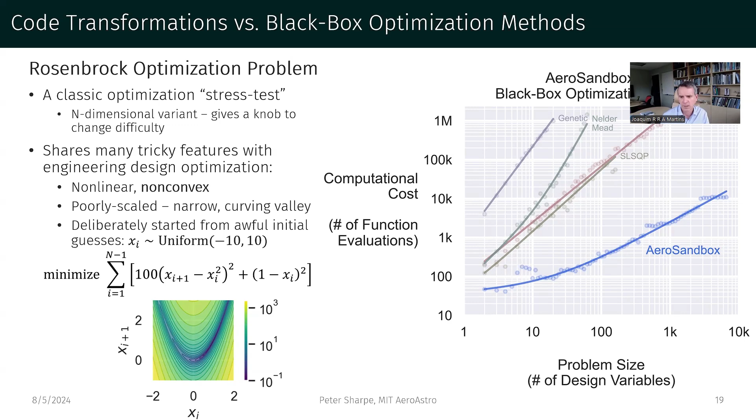When you talk about differentiation, you have the traceability, differentiate everything. During the presentation, in the thesis you mentioned this, but in the presentation I don't think you mentioned forward and reverse mode. Would you like to explain that a bit more? Oh, there you go, you did have it there.

So do you use the reverse mode throughout, or is there any situation where you use forward mode? Yeah, so there's a heuristic for it. It depends what you're evaluating.

For example, let's say that you're evaluating the Hessian - typically that's going to be forward over reverse in the implementation. If you're evaluating the derivative, or a gradient of a scalar though...

Sometimes you do in different places here. There's a heuristic, which basically goes back to number of inputs, number of outputs, but there's an exception where forward mode tends to be faster even if you have more inputs than outputs, as long as it's not extreme.

Is this done automatically then, this choice? It's all a heuristic and it's all automatic. Okay, great. All right, if you go to slide 48...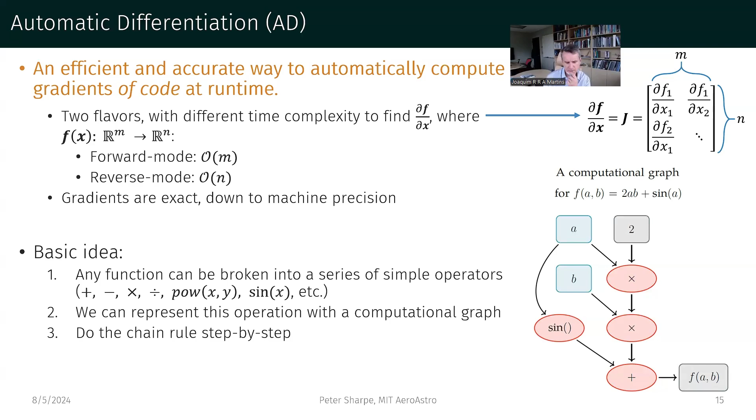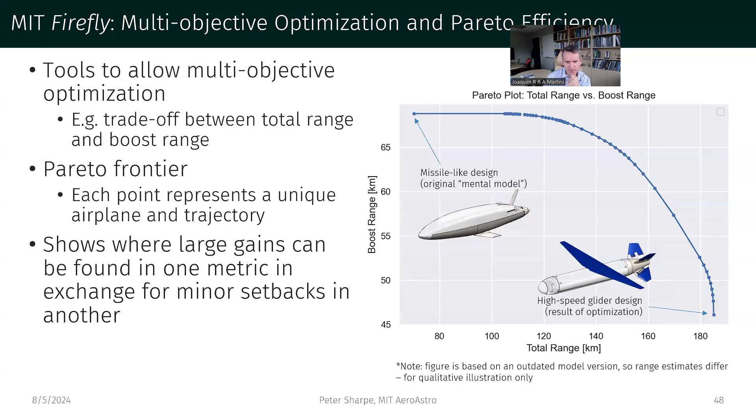You got a comparison with the expert designer and NeuralFoil, where you have the drag polars and airfoil shapes for... I can see number 84, I guess.

Yeah, so the shapes are pretty close between the NeuralFoil, Xfoil, and expert. Of course, I suspect the expert used Xfoil. But the polars of NeuralFoil look closer to the expert. But NeuralFoil is supposed to be a great model based on Xfoil. So what else does NeuralFoil know that Xfoil doesn't know?

That's a great question. The first thing is that they're analyzing different airfoils. The blue line, blue polar, is analyzing the blue airfoil. The green is analyzing the green airfoil, and there are shape differences between them. So it's not... but this was done NeuralFoil optimized versus Xfoil optimized.

Basically, you have optimization with Xfoil and optimization with the NeuralFoil surrogate. And if the NeuralFoil surrogate is very close - you showed previously very impressive matching with Xfoil - how can it get closer to the expert designed airfoil?

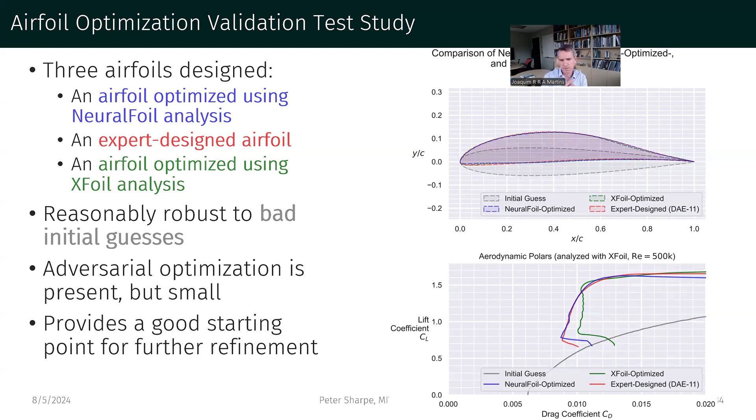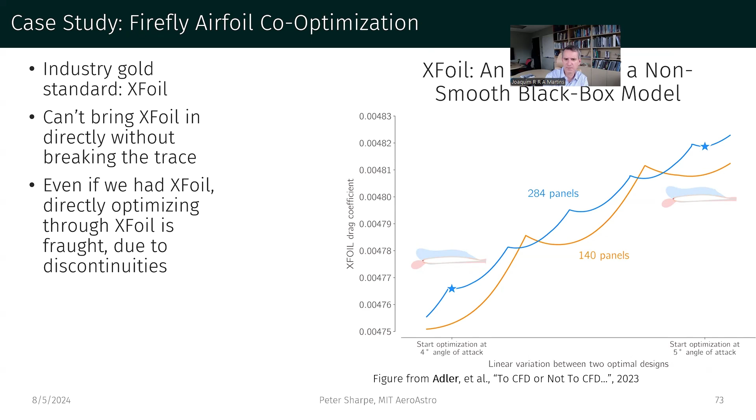Okay, so if you go back to the plot that Eytan did in his paper, if you go back more, here you got great matching. If you go back to the paper I wrote with Eytan, you had a plot showing the C1 discontinuities, right? So yeah, it is a case you get local minima, you'll get stuck there. Now if your NeuralFoil is such a good match to XFoil, how does it avoid these discontinuities? I mean, if it is so good, it would basically... well, it's like 1 or 2% good, but it's not like 0.001% good.

So it does go over the discontinuities, right? Okay, I guess I'd like to see this same plot but for NeuralFoil. That would be interesting to see. Yeah, because I buy it, it's probably smoothing things out, but how and how much, I think is an open question.

Is that NeuralFoil is actually C-infinity continuous by construction? The activation functions it uses are infinitely differentiable, which means that even if it were trying to learn a model that was not C1 continuous... No, I get that, but you can zoom into that peak and smooth it out and still have multiple local minima. And still get stuck, because if you have very high curvature somewhere, that's as good as a C1 discontinuity.

We could fix XFoil. And in fact, there are, for example, like Shun's work with intermittency approaches that actually does make XFoil C-infinity continuous. So this is an example case. It's not actually a limitation of the XFoil methodology, it's just how this implementation works. It's a good example case for what you would do if you had a discontinuous underlying function.

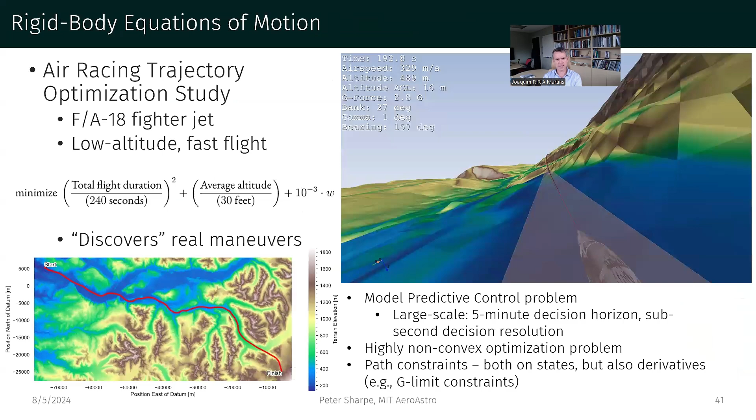A final observation, and I think if possible I'd like to have a separate meeting with you because I have more questions, and it got me thinking about a lot of things. Is a term like code transformation, that you define well in the thesis, but it's not clear if that's your definition or if it's a standard, widely accepted definition. Which one of those is it?

So I've seen people refer to these techniques as scientific machine learning techniques together, right? Well, no, I mean, again, I'm not an expert on machine learning, but yeah, NeuralFoil is using neural networks, but I wouldn't call all this machine learning. SciML is a bit of a misnomer, but people do use SciML to refer to a lot of things that, in my opinion, are not. Well, I don't know, is OpenMDAO SciML then? Yeah, I don't know. Well, that's a bigger discussion for another day.

But anyway, I have more questions, but in the interest of time I'll leave it here. And again, congrats on a really nice thesis, and really stimulating. Thank you.

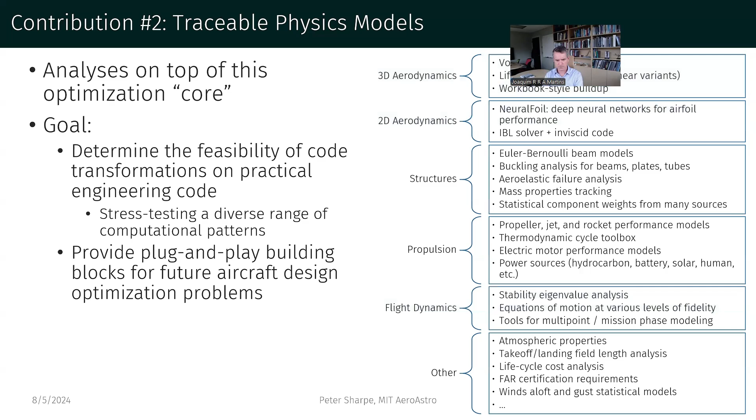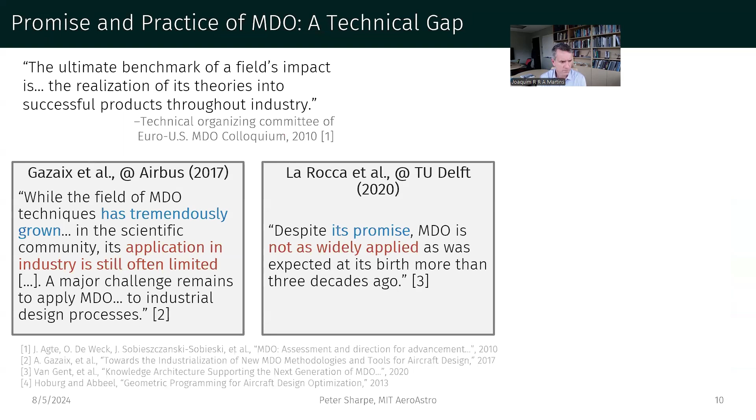So Peter, I want to ask my question. So you motivated the thesis at the beginning. One of the things you mentioned was the issue of reviewability. So using a technique like this, you come up with a design, and you now present it, but you need to be able to interpret it from the outside, from external review. Can you talk a little bit about where you are on that? Because that didn't show up very much in what you said.

Yeah, definitely. This entire kind of graph, that is probably the hardest step, right? How do you take your results and actually make them interpretable to people other than those who use it? One of the strategies that we have that's already useful is checking sensitivities, right? It's one thing to get to a point design, but can you check whether you're in a very sensitive condition versus whether you have something robust? That's a step towards checking whether you've over-optimized or gotten too deep into the weeds. Beyond that, some of the things we were talking about with constraints, where you can actually point the user: okay, you've got this bag of numbers, this vector of constraints, how violated or satisfied are they?

Being able to map those back to the line of code and say, okay, which constraints are driving, which ones are not driving. That's also pretty useful in determining what is actually shaping the design, right? Typically, if you look at those constraints, it may be only, say, 10% of those that are actually tight at the optimum, and depending on which 10, it may tell you whether you're in the part of the design space you expected to be in, or whether you've missed something you didn't intend to.

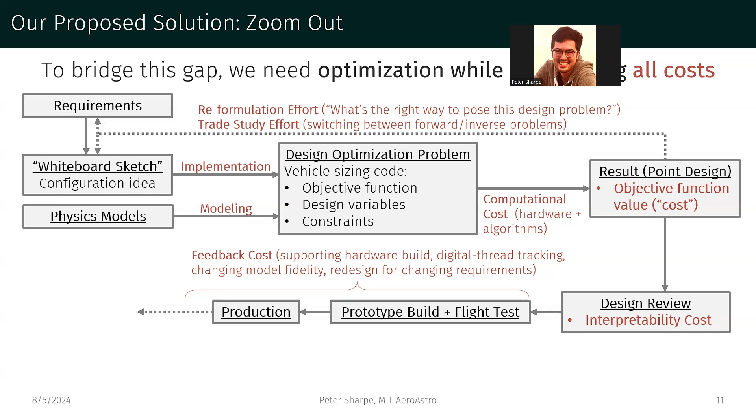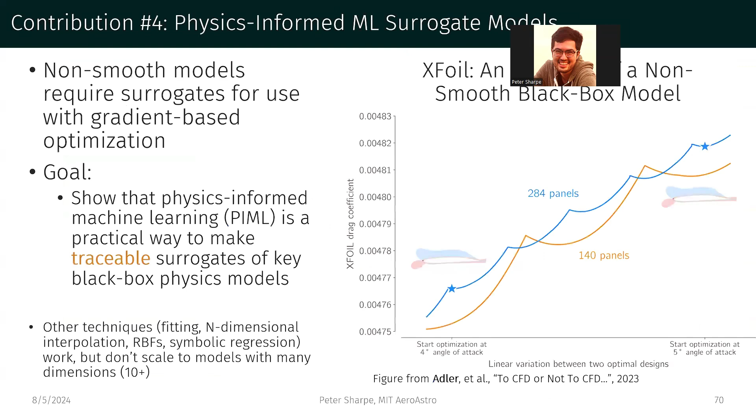One question I had about airfoil optimization in NeuralFoil. My understanding is that when you do that kind of optimization, you're using the Kulfan parameterization, also known as CST. Is that correct? Can you speak a little bit about the advantages of that relative to, let's say, just using the raw points?

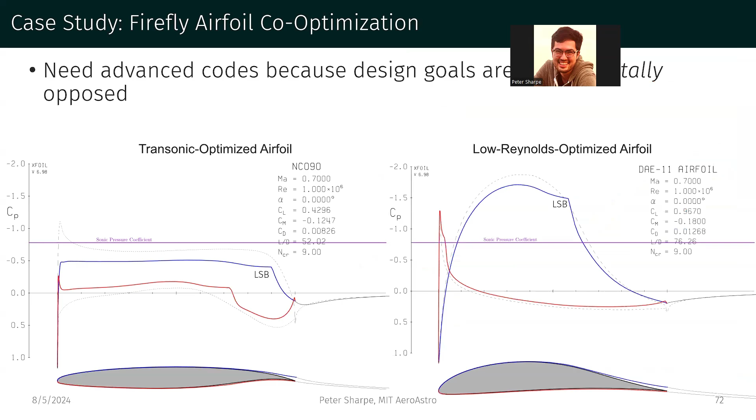Okay, yeah, that's a good question. So what we're talking about here is if you're doing this airfoil optimization, typically this airfoil is defined by say 200 points or so, order of magnitude. But instead of optimizing on those individual point locations, we're actually using mode shapes here, right? And this particular family is called CST, or the Kulfan distribution.

The reason to use a family as opposed to the raw points is that you have some intuition that a lot of the changes you're going to want to make to the design are not going to introduce very sharp local regions of curvature. Or if they do, they usually correspond to very local minimum stuff that you actually don't really want in the first place. So you do want some kind of lower dimensional parameterization rather than optimizing in the 200-dimensional input space of points.

Peter, sorry to interrupt, but as we know, we use FFDs. We use about 20, and that's enough to get as much out of the drag as possible. So that was not 200.

Testing? We can sort of hear you. Okay, try muting and unmuting. Testing? Is it maybe over here? Okay, that's better. All right.

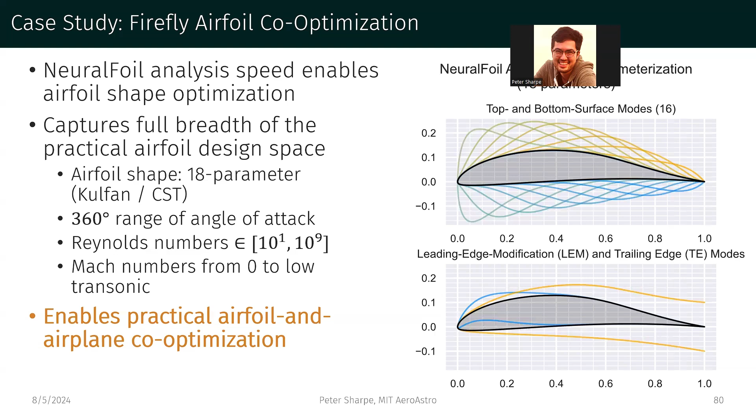Actually, what you mentioned is that you can have almost the same airfoil with very different parameters. That seems to mean it's ill-conditioned, right? I mean, the optimizer—that's a flat spot in the design space. Yes, this will cause actual problems. I was actually just talking with—let me pull up an email from—okay, guys.